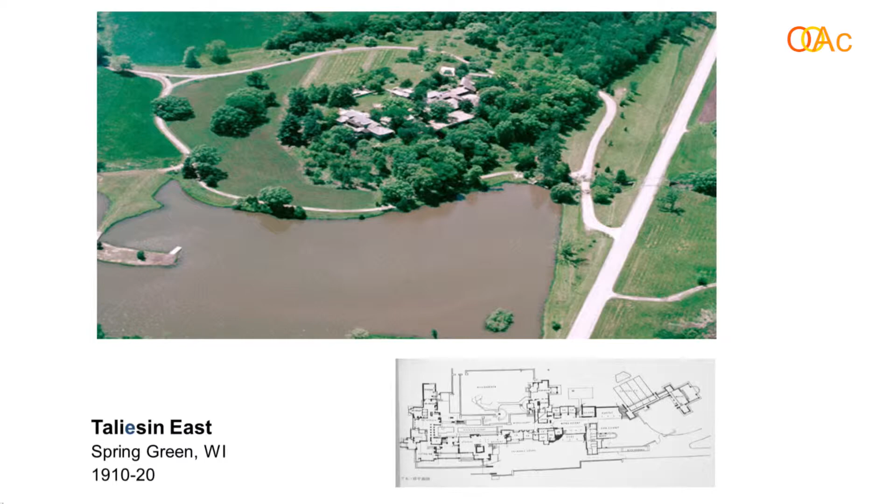So we are now going to look at Wright's work in the 1920s. In 1910 to 1920, Wright builds something called Taliesin, now called Taliesin East, because later he built another one in Arizona. This is a compound he built for himself, his family, and eventually his apprentices. He had sort of a school, but he didn't like the term school, so he called his students apprentices. It's in the beautiful rolling hills of Spring Green, Wisconsin.

He always tried to make these kind of enclosing interiors with sloped roofs. But most important during this period, he did a series of concrete buildings, and there are different names for them. They're called concrete block buildings, but they're not really blocks, they're tiles. So they're called concrete tile buildings, but also textile block buildings. The first one was the Millard House, nicknamed La Miniatura, in Pasadena, California.

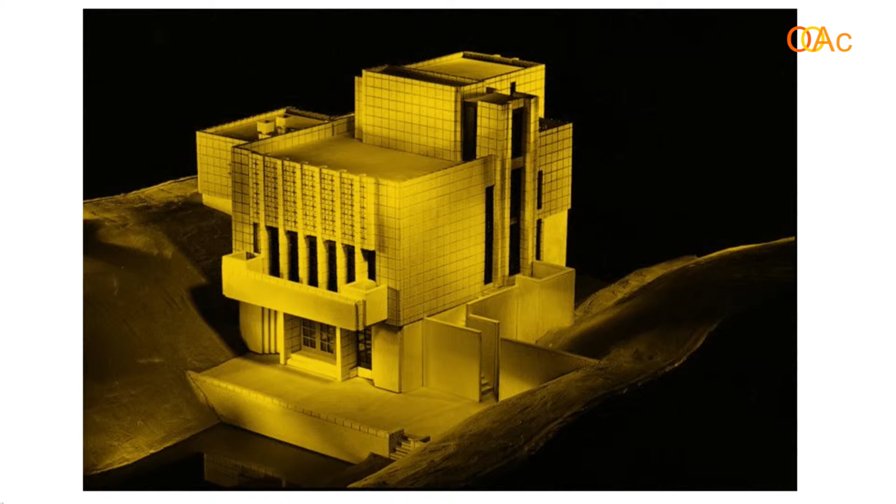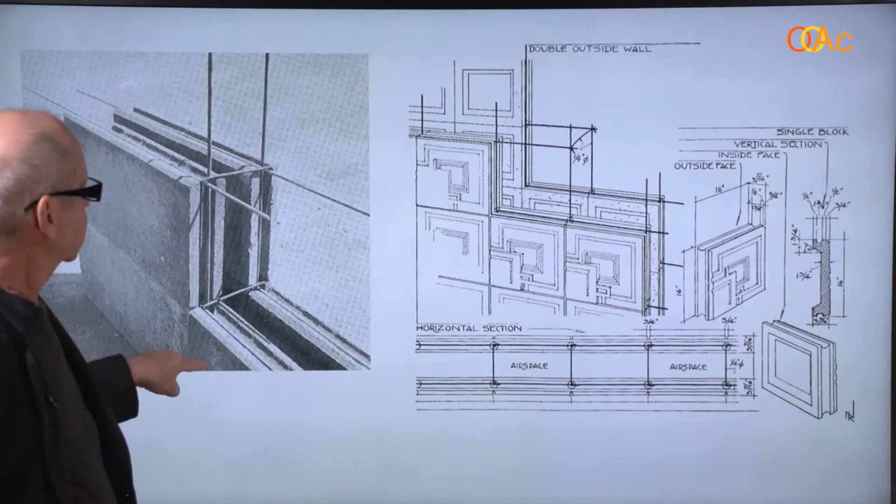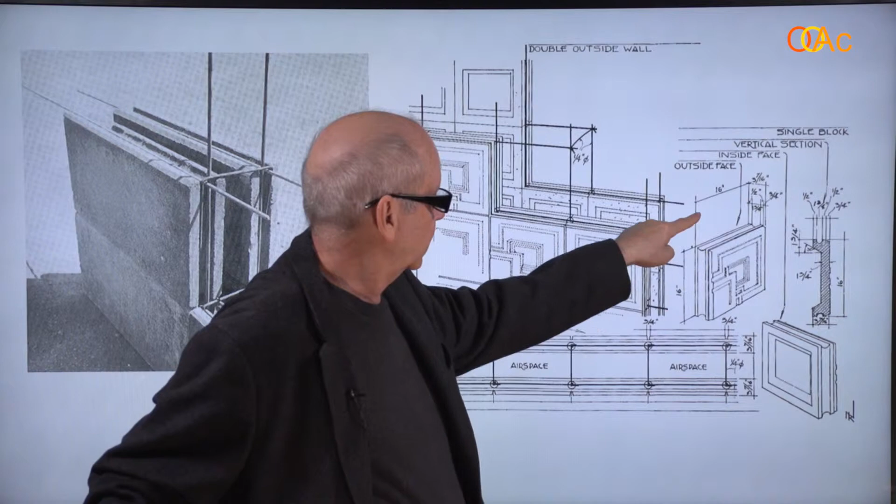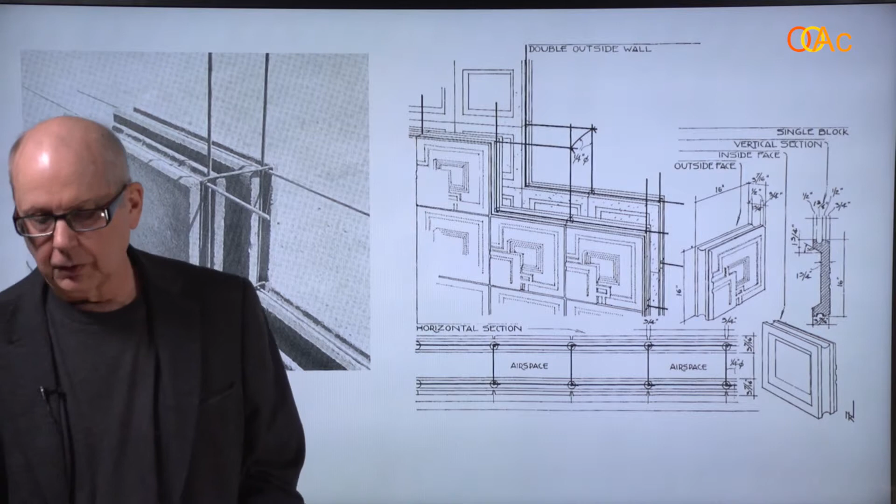Here we see the model of the house, and we get a sense of it because it's surrounded by lush vegetation, but it's made up of these blocks or tiles, and in between them he's got quarter-inch rebars. The tiles are about 3 inches thick with half-rounds running around them. So when you put two together, you get a full round, and you can drop a rebar in there and put grout in. That made the walls two-way reinforced slabs.

So it's a very strong way of building, and made for some very beautiful effects in terms of his ability to make the tiles have patterns in them and a variety of effects on the surfaces of the house.

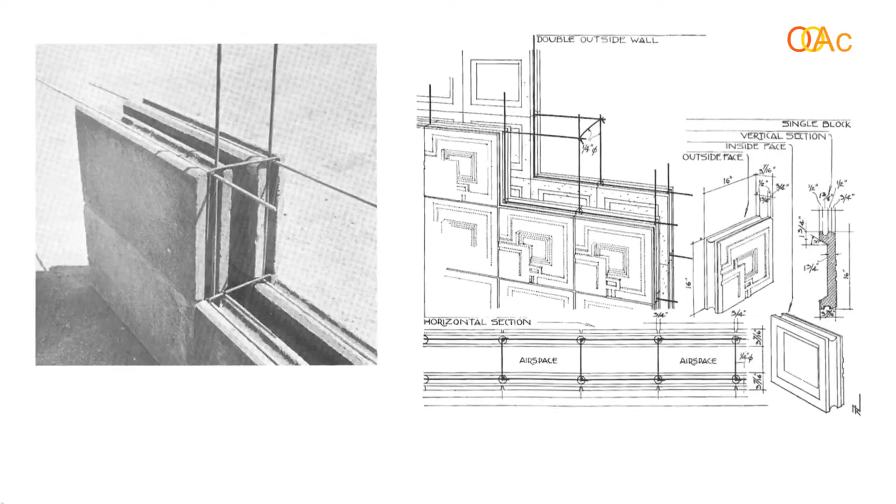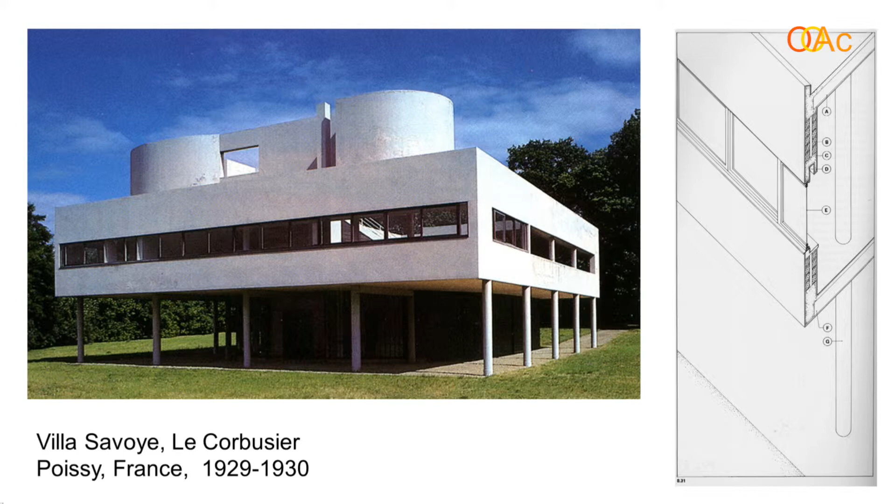Now, around the same time, Le Corbusier is doing his work, most prominently the Villa Savoye. Whereas Le Corbusier is building in block, he then stuccos over it, whereas Wright leaves them exposed. So Frank Lloyd Wright and Le Corbusier are the two most prominent, most important architects of the center of the 20th century, and one can debate which one is more important. It's a fun discussion to have.

So something for you to think about: how do you feel about the use of exposed concrete for the interior of a home? Just something for you to think about.